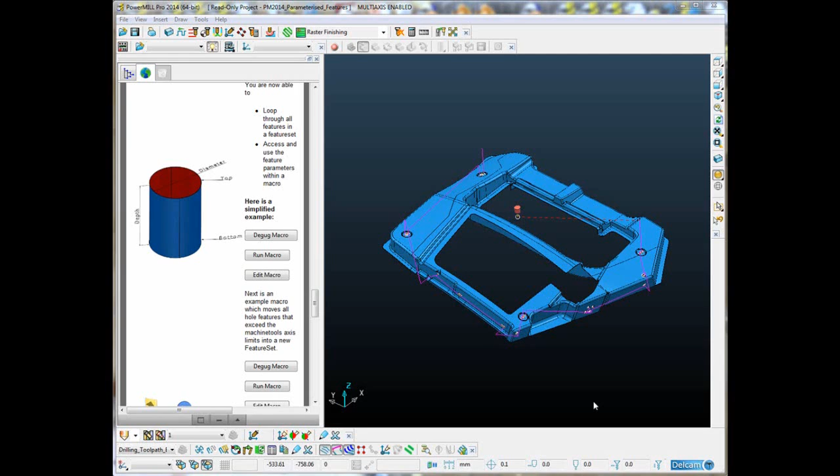The features inside a feature set are now fully parameterized. This enables us to access those parameters within a macro and to use them as we'd like. Let me start by showing you a very simple example. On the screen I've got a model with some hole features.

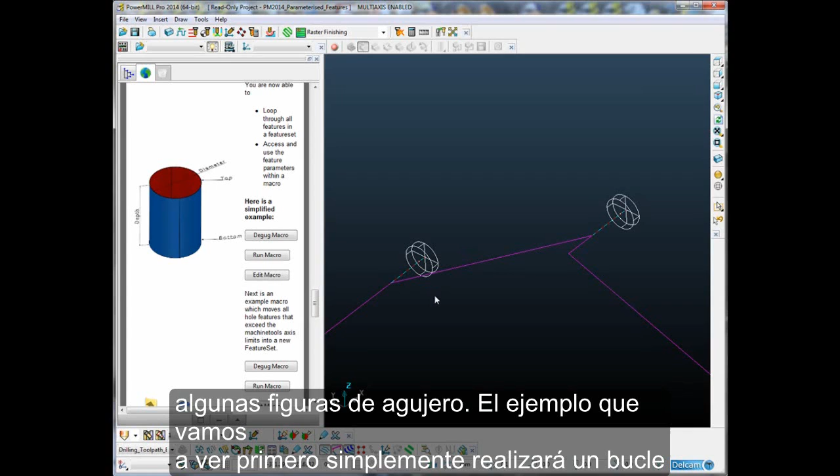The simple example I'm going to show you first is simply going to loop through each one of those features within the feature set and analyze the diameter, the depth, the top, the draft angle, etc. It's then going to pop up a message to the user informing us of those values. Let's just take a quick look at the macro. If I just edit that macro.

So the first thing we're going to do is just to create a new variable, a string variable with nothing in it. It's going to eventually contain the message that we print out to the user, but we're going to build this message throughout this loop. So this is the start of a loop where we loop through each feature within the feature set. That's exactly what this will do. $f is simply my own variable name.

Now the feature has got a number of subparameters. This is .name, which is the name of the feature. .type tells us if it's a boss, a slot, a pocket or a hole. The top and bottom are the Z values of the top and bottom. The depth is the distance from the top to the bottom. The diameter is obvious, and the draft is the draft angle. We also have the axis.

Now you'll notice I'm using print par rather than print equals for the axis, and that is because the axis is stored as a vector, which is what we call an array. Basically it's multiple numerical values, so it must be stored in an array, and we can't use print equals to print out the contents of an array. We must use the print par command.

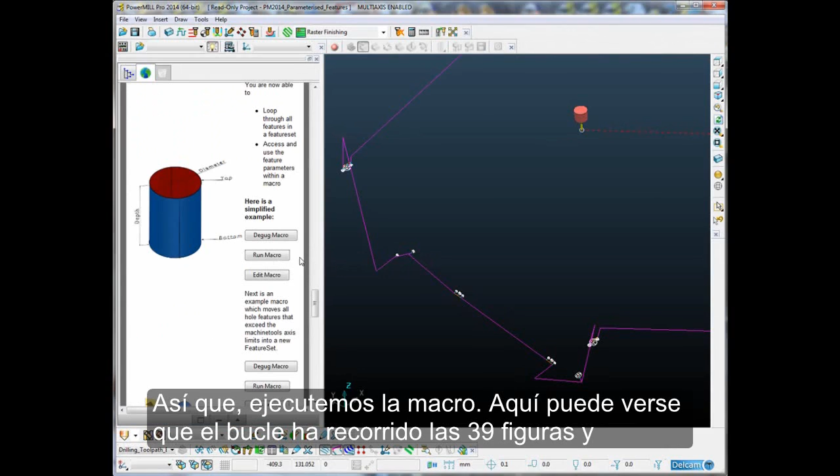So let's try running that macro. And there you can see it's looped through all 39 features, and it's told us the diameter of each and every one of them. So let's look at a more practical macro. So this is a little bit more realistic.

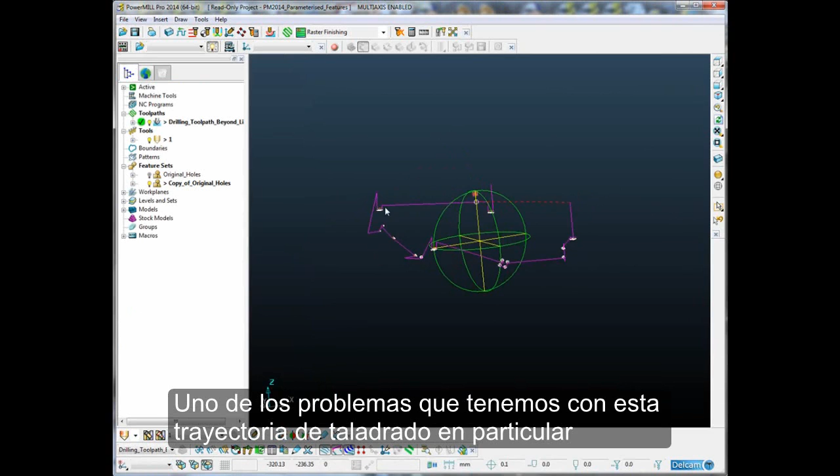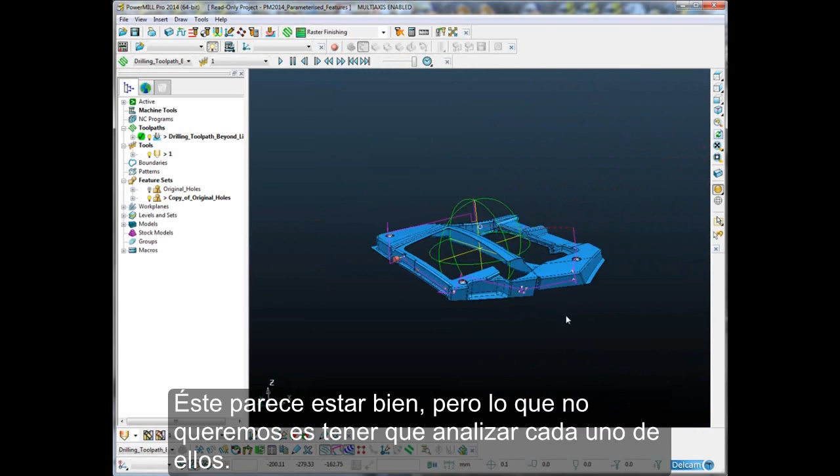Now one of the problems I have with this particular drilling toolpath is that some of the holes go beyond the tool axis limits. Now I'm not sure how many, and sometimes these toolpaths have a great deal of holes in them, and I obviously can't machine it if it's beyond the tool axis limits. So this one looks okay, but I don't want to have to go and analyze each and every one of them. So what I've got is a macro which analyzes the tool axis.

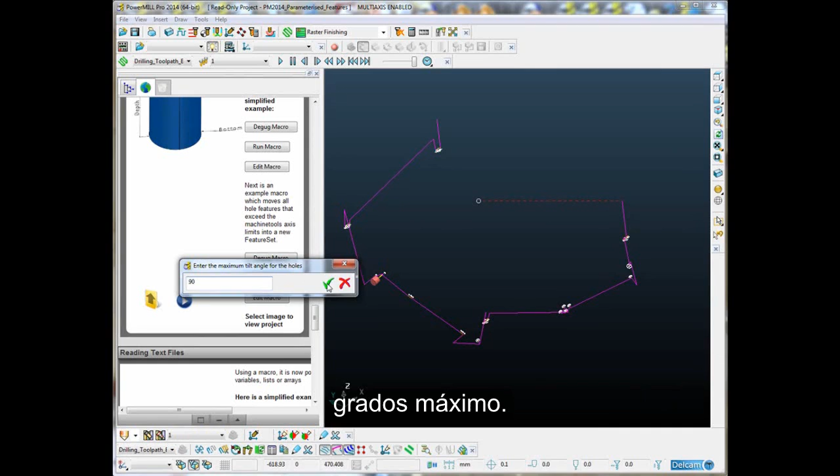It will ask me what the maximum limit is, so if I just run that macro, it asks me what is the maximum tilt angle for the machine tool. Now I'm going to say my machine tool can tilt to 90 degrees and no more. It's going to analyze every hole, and it's told me that 6 features were out of limit and they have been placed into a new feature set which is a copy of the original.

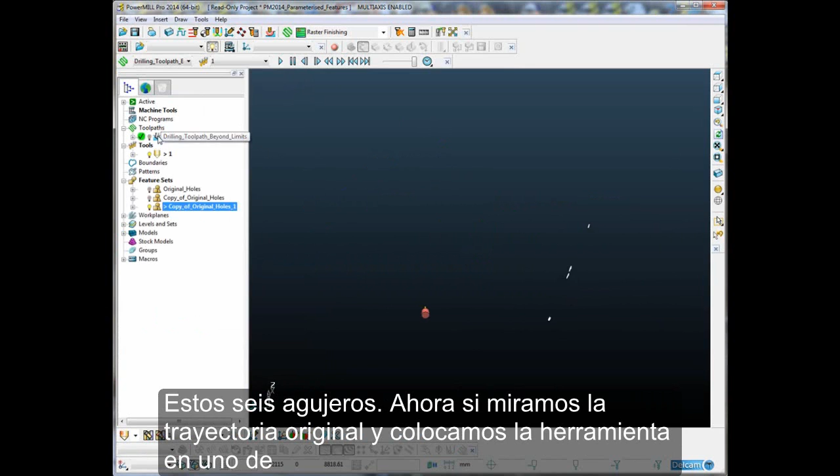So let me just switch off that toolpath for a second. It's actually removed all of the holes which were out of limits, and it's put them on a new feature set. Here they all are, these 6 holes. Now if I look at the original toolpath and I just attach the tool to one of those particular holes, we can see that it is well beyond the 90-degree limit.

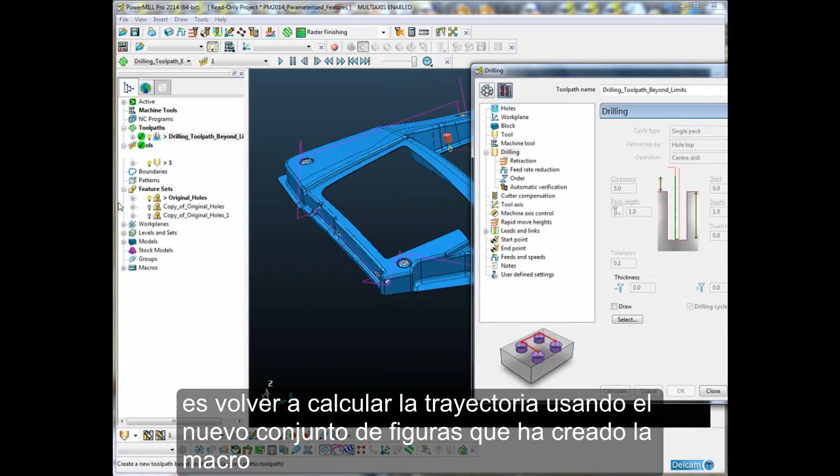So what I can do now is recalculate this particular toolpath using not the original feature, but the new feature set which the macro created, and just recalculate that, and now everything will be within limits.

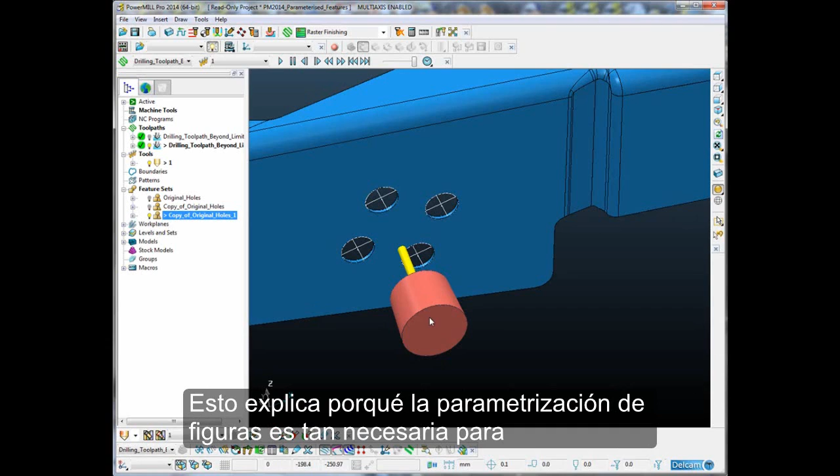Now unfortunately I still have 6 holes which I have not machined, but it's simply impossible to machine these 6 from this setup, but because they're in a new feature set, here they are, I could machine them from a different setup. So that basically is just one example of why the parameterization of features is a great thing for the macro writer.